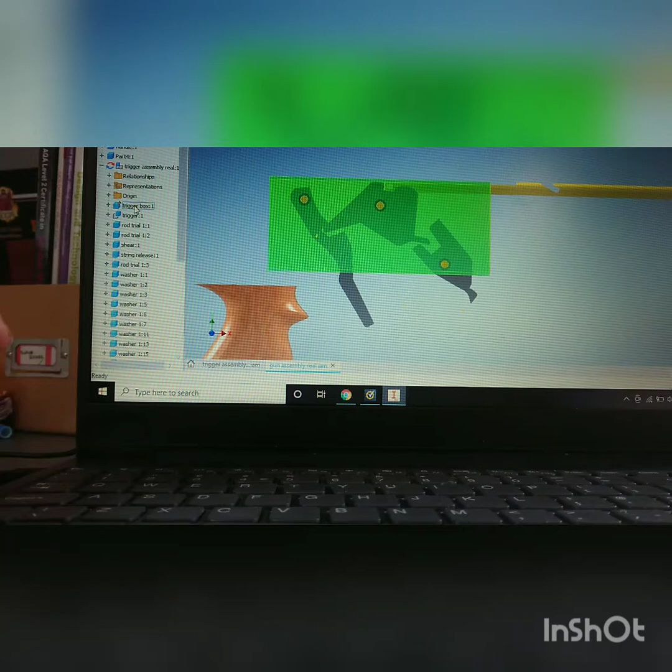Now we're going to have a look at the trigger mechanism. As you can see, here is the box section, but for simplicity reasons we are going to just get rid of that for now. Now all that is present is the trigger, the shear, the string release, and obviously the shaft.

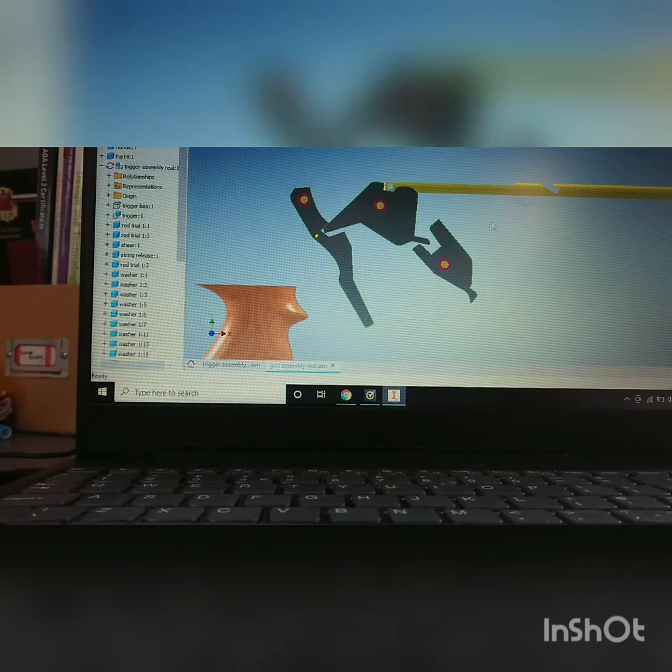When the gun is loaded, the shaft is going to want to move forward in this direction, as this is the way the bands are pulling. However, as it is in the trigger mechanism, it is locked in place by the shear and is released when you pull the trigger.

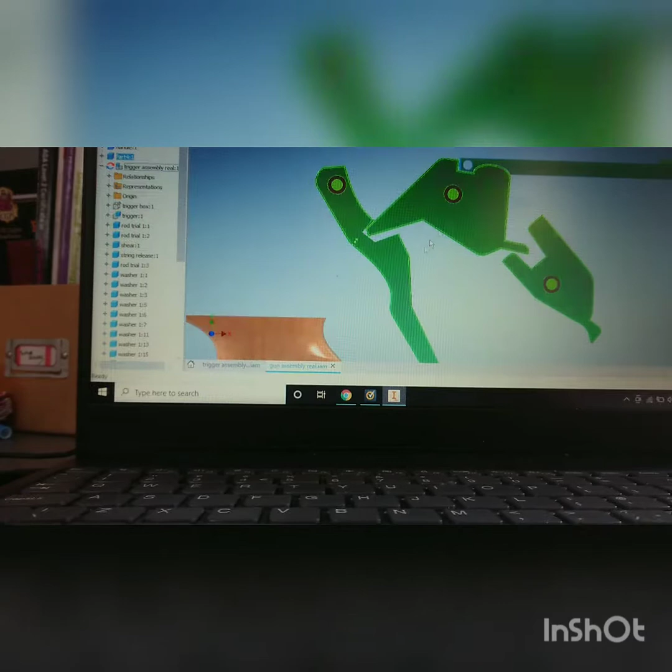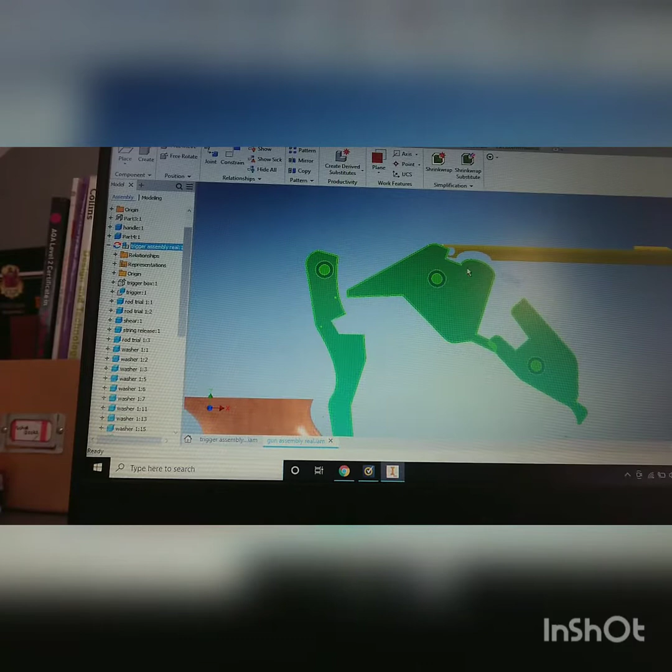When you pull this trigger back, the shear is able to move downwards, rotating around this fulcrum. When this happens, the shaft is able to move forward freely through the water and hopefully hitting the fish.

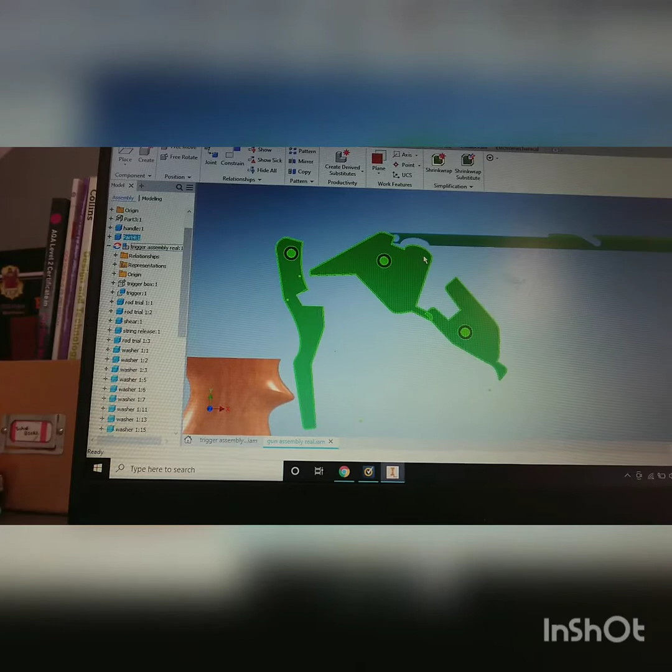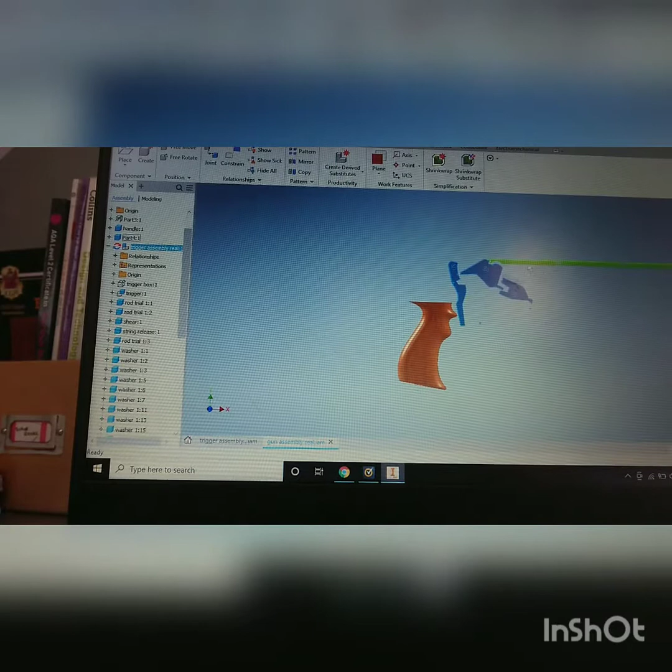Meanwhile, as the shear moves downwards, releasing the spear, it also activates the string release, as this piece here pushes down on this, meaning that the string is released from here to here. This piece is now inside the gun, and therefore the string is completely released, along with the shaft.

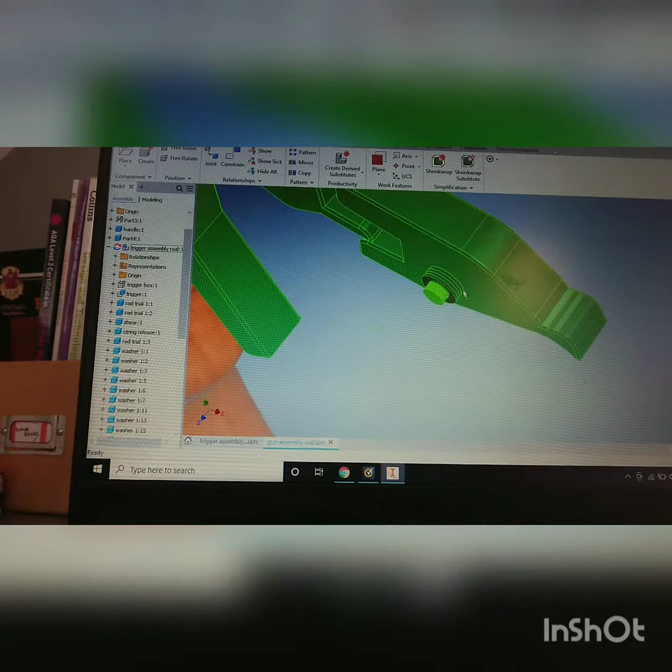As you can see, I'm planning on making my trigger mechanism out of 8mm stainless steel. The pink washers space out the pieces in the box section, and this yellow piece here is a shaft of its own that goes through each of these trigger pieces, as you can see.

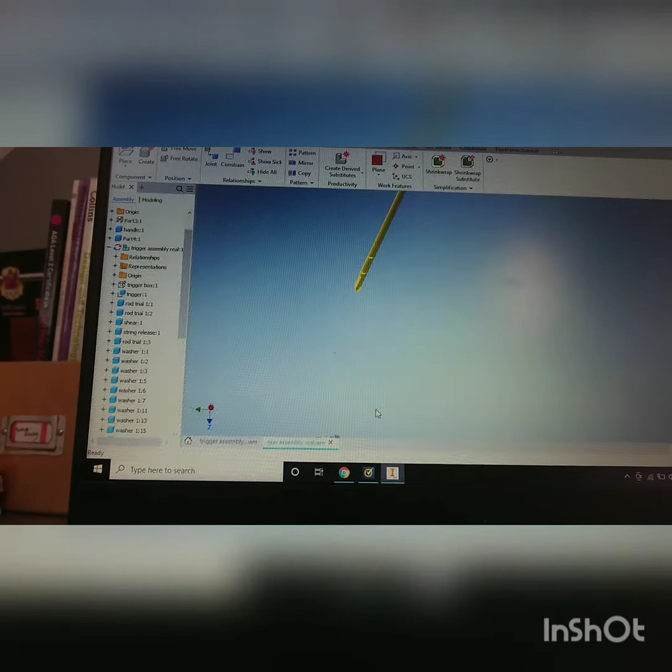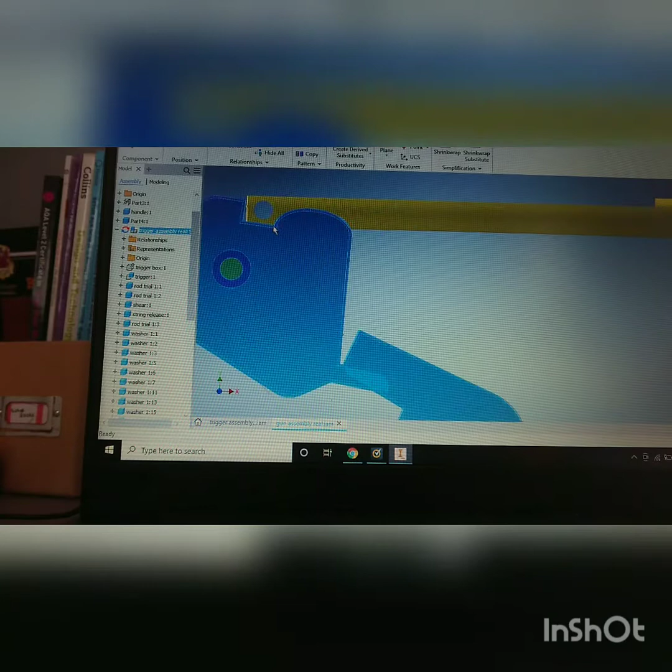Then, when you want to reload the gun, you simply pull the shaft back. This little piece here is where the shaft pushes onto. This movement pushes this back up, and the interlocking shaft is back where it is, locked in position once again.

This piece also moves back, the string release also moves back up as the gun is reloaded, meaning that you can now reattach the string to the string release. Finally, you push the trigger back in and it is reloaded.

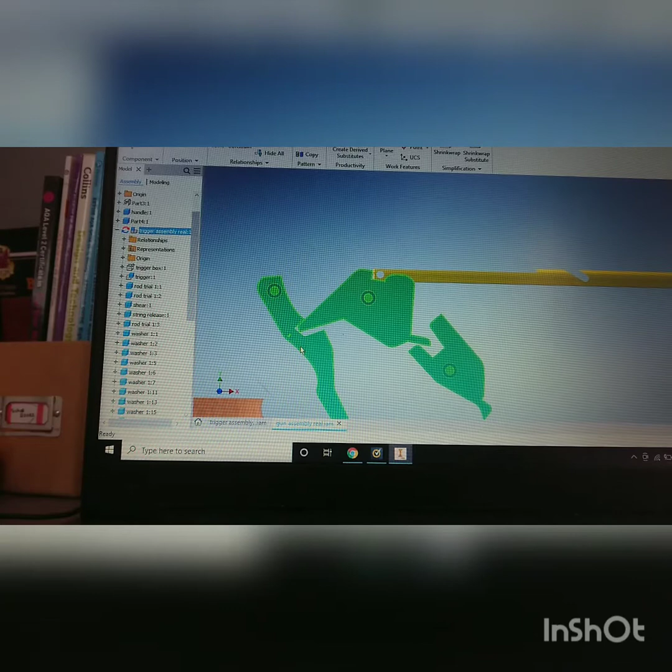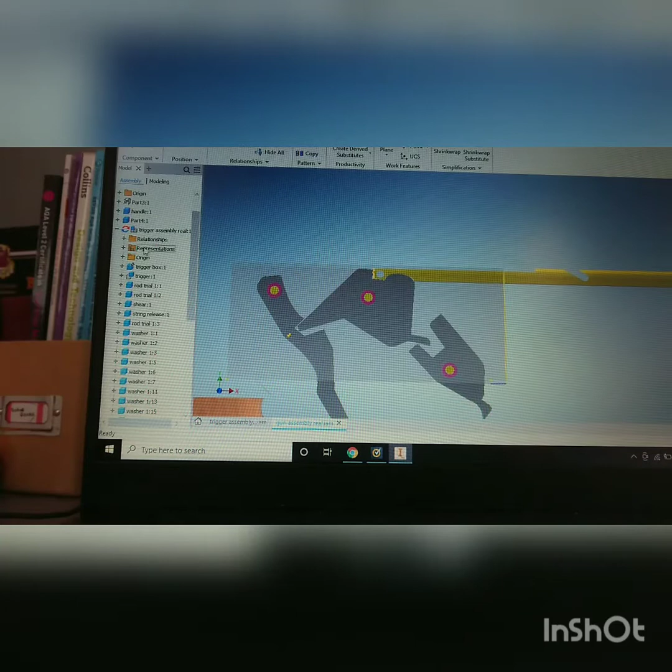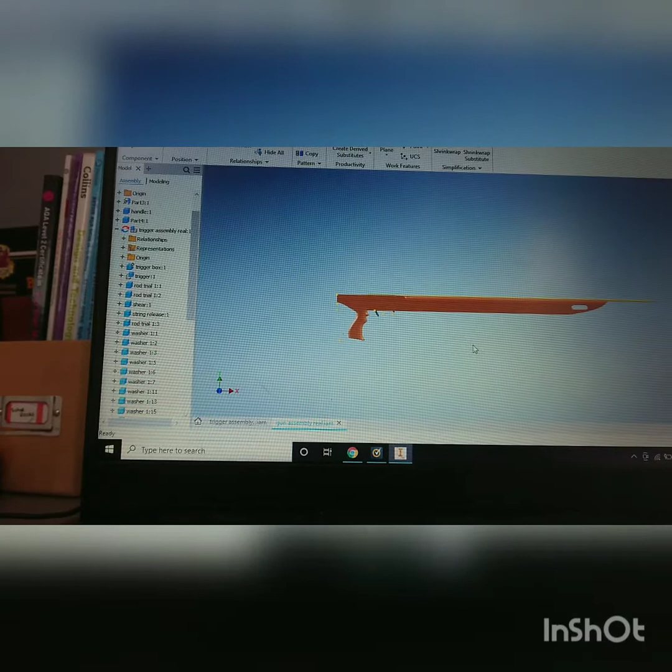Finally, to see it in action, we will now replace the box section, which we can make more visible. It's now a yellow colour. In real life it is stainless steel, but so that you can see it better, I'm making it yellow for now. We will also replace the stock, and now you can see the gun is back.

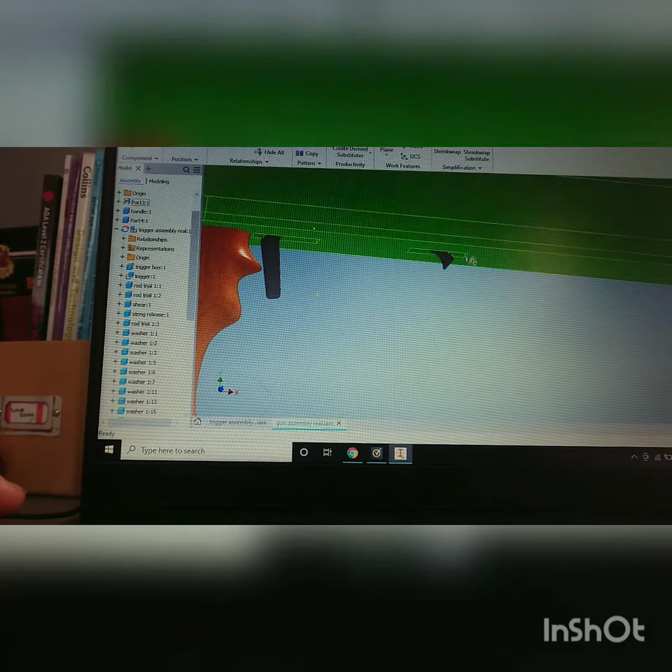So, once again, if you pull the trigger, the shear is going to move inside. This will move the string release down as well, inside the gun, and therefore now the string is released.

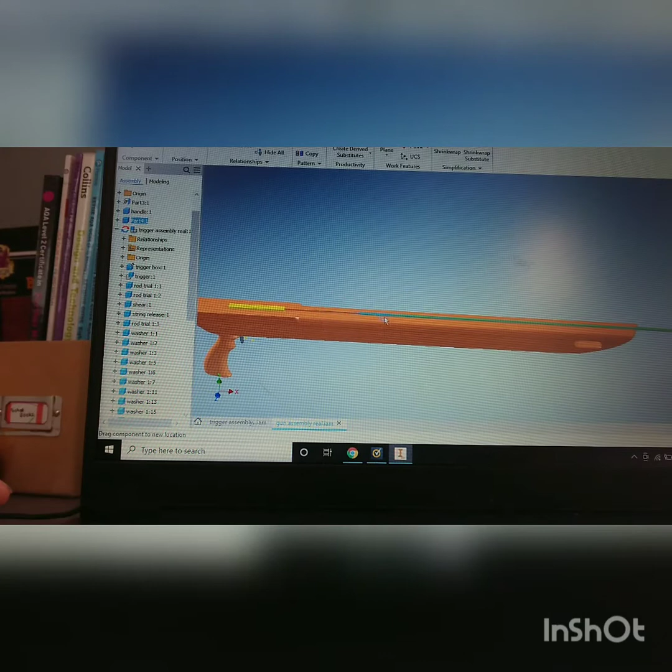Also, remember that this shaft is now free to move, and therefore the bands will pull it out of the gun, shooting it forward into the distance and hopefully into your fish. Here is my trigger mechanism.